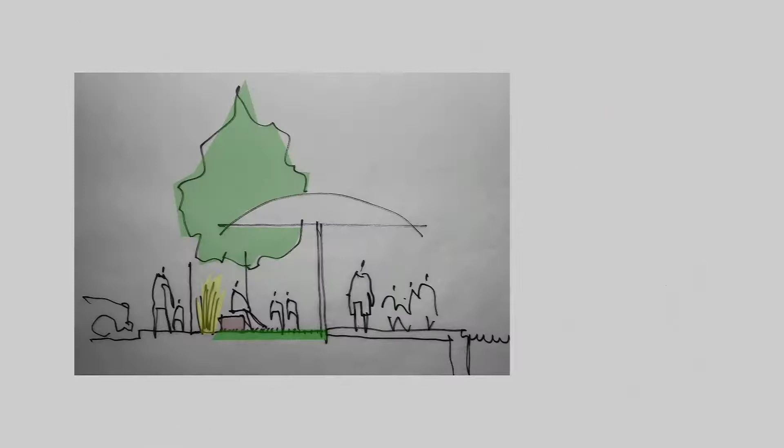So what we were proposing, on this sketch you can see on the left there's a car, that's the parking lot, there's a curb, and there's a 6-foot fence, and then there's the added area we're adding. It's about 12 to 13 feet, depending on what we do with the fence.

Our concern architecturally is if you put a berm there, you're going to go up quick and down quick, and then you're going to have this weird area between the fence and the berm. All your leaves are going to gather there. The kids are going to fall down. It's kind of a strange area.

And there's some cost associated with berming that turf. So the thought was, could we just put it in flat where we get the same effect and maximize the turf area? If it's bermed, you might not want to be on the backside since it's facing the fence — you mainly want to be facing the pool. So what if we just put it in flat? It'd have an organic shape, it'd be turf, it'd be great, but it just wouldn't have a berm.

That's an action item. What about on the southeast corner, or the northeast corner, where we have a little more room? We could berm it. The downside is that area is actually a little smaller because we try to make room between the fence and the berm, if it is bermed, for landscaping behind it. And again, if we berm it, you still got to come down the backside. One of the thoughts we had was, could we do a retaining wall and berm it up to a retaining wall so that it's just a slope in one direction?

Up and back down again. No, we did berm — you could go up and stay up on it.

Good. A little more cost — when we put that retaining wall in, that's going to cost money. And the fence along that sidewalk edge, we'd keep the top of it level, but it would jog up and over, or we'd have to put it on one side of the retaining wall, so you'd have an interstitial space against the wall where stuff would fall down in there. So we don't have to know this exactly right now. I think the question would be, are we on the right track with two turfed areas?

Budget-wise, we'll get into this a little bit more, but the budget that Count Gordon put together for the shading structures came in pretty good. They got some numbers, so we might as well address that now. They've got between $85,000 and $120,000 for 6 shading structures, and these are large shading structures.

The one I've got shown on the sketch is a 16-foot diameter shading structure. This would be round, or could be square with a center post. We could do 6 of these, or some combination with rectangular ones. They priced the 16 by 25s too - you can see on this drawing there are actually 3 rectangular ones, and then the round ones over in the northeast corner.

If you think this is the right direction, we can mix and match these shading structures, but we would take a couple of those, the value of them, and apply that to turf, since the turf is not something we had in the original budget.

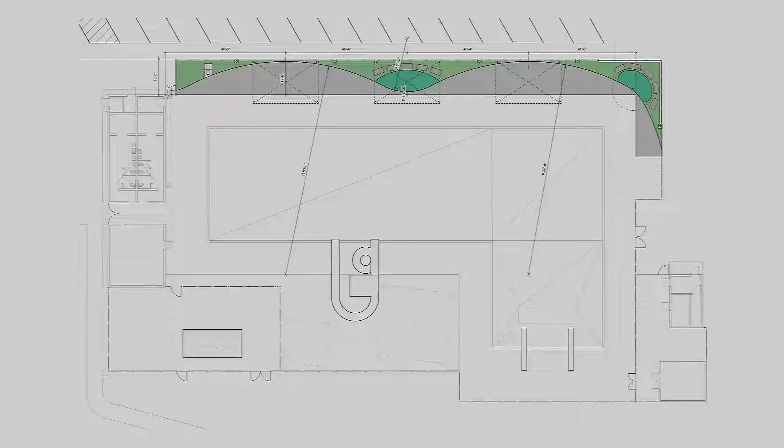I have to focus on the splash pad if it comes down to costs. Take it or leave it, I don't care. I don't know if it matters for swim meets one way or the other. Doesn't matter. Yeah, so just concrete that middle one too.

It's a good idea. If we can do a nice one over by the splash pad that will stay there for a long time, I think that would be my suggestion. You got more real estate there.

And as you'll see in the next couple of slides, we will have to bump the fence out. So if we're replacing fence anyway, where that ends up probably isn't a big deal. Big splash pad for sure. Sounds good, big one. Oh, one other thing, I'm sorry — light poles.

We did a kickoff with our engineers, our mechanical and electrical engineer, neither of which has much to do with this project directly. They're more going to be engaged for our building up north of town for the fitness and aquatic center, but we are engaging them here in case there's a few things they need to take care of.

One of those is light poles. Right now the poles acting as light poles are really fence poles with a light fixture mounted to them. They're going to have to move when we tear the fence down because they come down with the fence. So our recommendation is that we replace them with 3 poles instead of the 4 there now. Our electrical engineer believes we could use 3 poles and illuminate the area better with fewer poles. That's something we'll have to work into the budget.

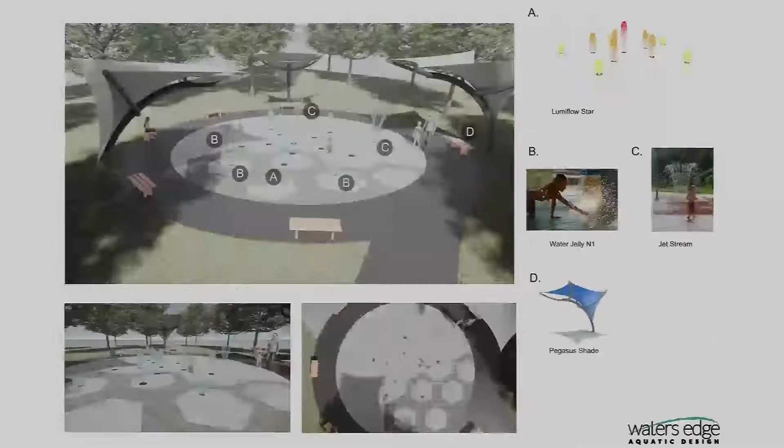As you recall, last time we talked about the splash pad options, and Brian gave you a whole bunch of options. I think this is the one he focused on, and the one I recall people really liked, because it's kind of organic as a round shape, and it starts to work into this pattern on the concrete, which people have liked. Then we had a big discussion about features, which he hasn't gotten into too much, but we asked him to integrate it into our model so we could see how big this is. What we see here is pretty big—will it fit on the site in the spot we've got?

So he went ahead and put it in. This is our model—a little slow, it's kind of a big file. This is the model we provided. We've modeled the whole facility, and you can see over where the wading pool was, they've got this round splash pad.

It does protrude a little bit into the green space. Likely, as we massage this, it'll have to go a little further south, and we'll work in a berm—maybe a horseshoe berm that follows the circle—and wrap your fence around it, similar to what we're doing on the north. So there'll be some continuity around the site with different details. So what I'm asking is, does this location, size, and shape work for you, and was I accurate that this is the one you like?

There's going to be a fence around that splash pad? As you recall, we're going to do two fences—one on the perimeter and one on the inside so you guys can open it when the pool's not open. Where's the access? Is it going to come to the south, or when the pool's not open, or are we extending where the concession area is?

It's your choice, it's not shown on this plan yet. What I'll do is get that model updated and put that into this plan, but with the fence around the round part, you could have an entrance off the south, off the park. That's where I was looking at the model—I just didn't see if that was supposed to be there.

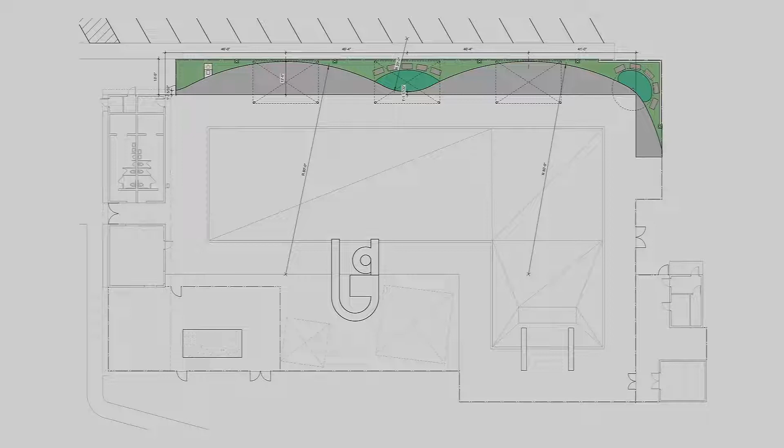Yeah, we haven't—it's really just a placeholder right now. We'll need to work the fence in, probably redo the sidewalks a little bit to get you where you want to go. We started showing gate locations, and we'll need to come back at a future time and show you exactly where that entrance is to get your approval.

Blake? I like it. I think that's a good size. It'll be interesting to see where you guys put a berm and stuff, because we do have the gate on the south side to work with. Yeah, it's a good start.

What's the diameter of that? You know? I'm not sure, I'll get back to you.

Yeah, we'll have to get back with you. I don't want to guess, I'll be wrong on the record. So, yeah, it's 80 feet wide.

Yeah, and I think we'll definitely need to come back with the features and how they integrate, because it looks to me like they've inserted some features, probably the ones we talked about last time, but he'll need to be here to explain that.

It's possible that if you do this with the berm, the sidewalk currently that comes down and just angles there might reflect the curvature of the berm, with penetrations there for the entrance. So it could turn out to be a pretty nice feature from the park side. There are quite a few features there, so it looks good.

Good. Well, I'll let them know that this was something you guys approved, and we'll move forward with the final design.

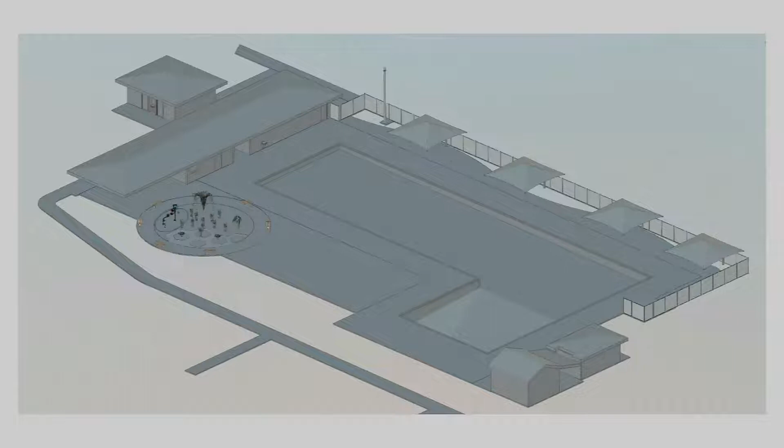Okay, I'm gonna let Blake start, and then I'll jump in because we've been kind of working together here. Yeah, I've been working with Terry and Robert on some programming side of it for the rec center and indoor pool, and we met with them. They've done a lot of the YMCAs, so they have a lot of good input from the DRC.

He was giving us, they built their rec center in 2 phases, and he kind of explained some of the things he noticed when they built the first one, what they wish they would have done in phase 1 that they struggled through in phase 2. So we've been working with him, comparing the size of things in the program so far to DRC's rec center and the phases they did it in.

So it was really good input. I think we met for about 2 hours the other day and it gave us some good ideas - you don't want to build small in the first phase because there's no room to expand, that kind of stuff. So it was really good information for us to start working from.

So we've got a few drafts done. We definitely talked about some spaces that could be phased and others that really can't be. There's certain infrastructure things that are really hard to phase later, so we started talking about those.

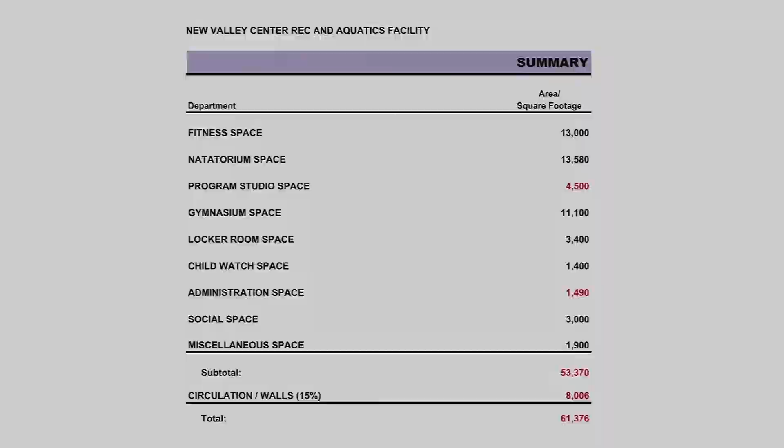That's all we got today, unless you guys have anything. We owed you one short meeting. But we haven't gotten to general discussion yet.

That's up to, I don't really work... this is part of mine, so it's folks that actually have a work schedule. No, but folks that aren't around here have the flexibility, the 8 to 5ers, you let me know what works for you all. Fridays work. Friday afternoons.

Friday afternoon, depends on which day of the week or which week of the month it is. But I'll figure it out. If I can go, I go, if I don't, I don't. Is there a certain one this month? Why don't we work on a list of suggested places and start working towards that. We'll have to line it up with the facility too.

You want this Friday? Afternoon might work pretty well for us today as well. I don't think it would be a problem with them. Because if you do that first, then I can send out a Survey Monkey, and we have great response from that, and then everyone can see who has the, whichever day has the most, and go with that. Sound good? All right.

I can make the 26th or the 2nd work. As long as we don't get into football season, Fridays aren't so good. We need late afternoon. Yeah, we need to try to do that here when it gets to that.

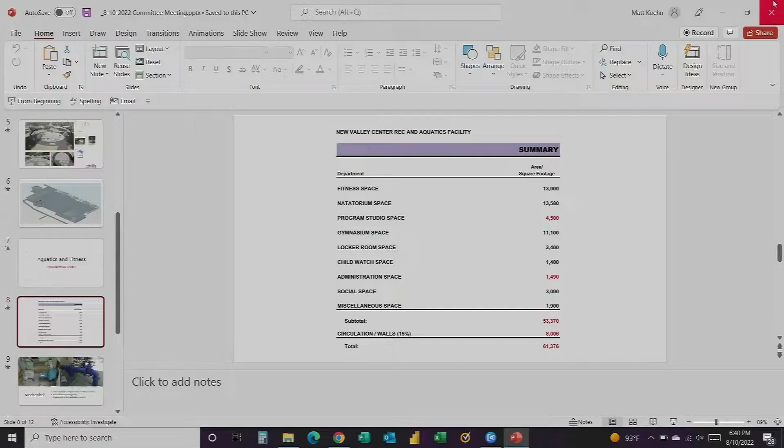All right, moving right along to item 6C here, general discussion. I do have a few items here, some housekeeping items for general discussion. I did not have a chance to put on the agenda, so I do apologize for that.

Fundraising. We need calls from back when we promoted the sales tax. After the sales tax, we did kind of say, hey, we're going to fundraise $2 million. And so we want to make sure that we do that to the best of our ability. Hopefully we can raise more than that. The more that we raise, the more that we can put into some of these items, or we can spend a little bit more now that we're seeing the design come together with the outdoor pool renovation. If we have something to show folks when we're asking them for money, it's a lot easier for them to be giving and opening up the checkbook.

So I do think that we have to have a separate committee, because this is a large group, kind of 3 or 4 maybe, that are going to tackle the fundraising side. So I kind of wanted to plant that seed in everybody's head here and think about it. Or if somebody wants to start volunteering now, we can do that too, or we can do that next meeting. It's up to you all. But we do have to come up with a fundraising committee.